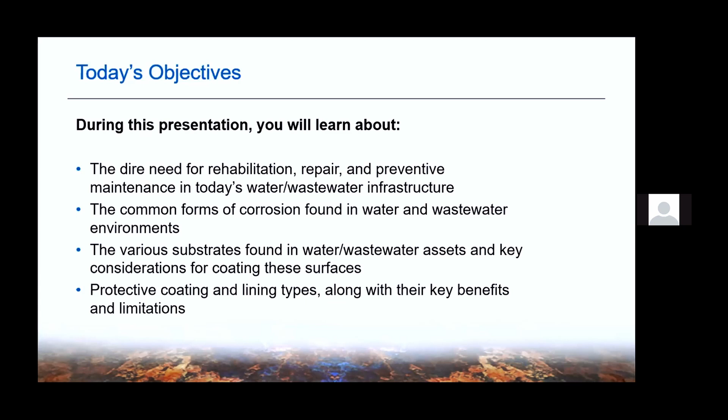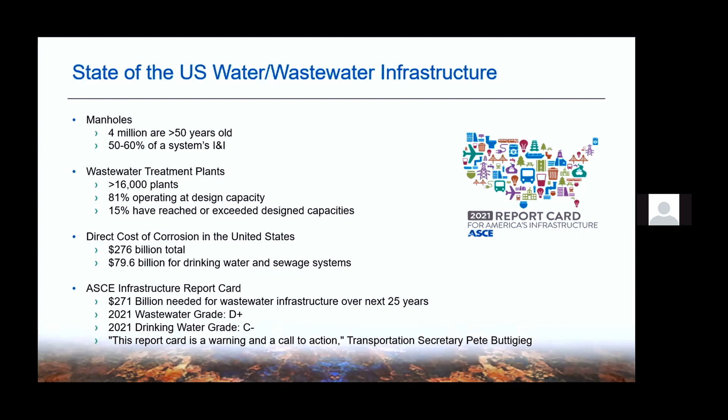So I would venture to say that almost everyone on this webinar today has probably seen the data or has heard the reports about the current state of the water wastewater infrastructure in the United States. If you look at our infrastructure here in our collection systems, many of the manholes are beyond their expected design life. The fact is that there's approximately 4 million manholes here in the US that are greater than 50 years old. Inflow and infiltration is a big issue in a lot of these systems. Quite frankly, a lot of that enters in through a manhole. And what happens is the treatment plants get overburdened with all of this extra inflow and infiltration.

You'll often see manholes called the low-hanging fruit of infrastructure rehab. Part of that is because of their accessibility, but I would say mostly it's due to the fact that about half of a wastewater system's I&I enters in through a manhole.

So talking about treatment plants here in the US, we've got roughly 16,000 or so publicly owned wastewater treatment plants. Scary part is it's estimated that about 81% of these are operating at their design capacity. And the even scarier part is about 15% of those have reached or exceeded those design capacities.

So many of you, being members of NACE and being involved in the industry, you've probably seen a lot of the reports on the direct cost of corrosion. There was a report that came out in 2002. It was a joint report from NACE and the Federal Highway Administration. In 2002, they estimated that direct cost of corrosion to be roughly $276 billion. Some of the latest numbers on that, 2013, it was upgraded to, or downgraded, depending on how you look at it, $476 billion. But I would be scared to see what that cost might be today, given the inflation that we're currently experiencing.

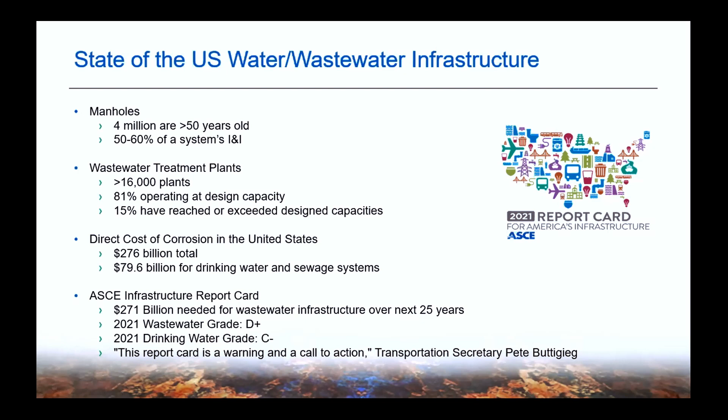So moving on from the US, but speaking specifically to Canada. How does Canada stack up when it comes to the water and wastewater infrastructure? To help answer that question, I referenced the Canadian infrastructure report card. The latest version of that I was able to locate was 2019. It actually rates potable water systems, wastewater systems, and stormwater systems.

So we'll be talking today for a minute about potable water and then wastewater. If you look at the potable water infrastructure assets that were included in this survey, they break it out between linear, the linear portion of these drinking water systems, which are going to be your local water, transmission, distribution pipes. And then your nonlinear assets are going to be your drinking water treatment facilities, your pump stations, and then your reservoirs. And so if you look at that category, kind of the scary part is approximately 25% of the potable water infrastructure was found to be in either fair, poor, or very poor condition.

So if you look at the wastewater side, it's not much better. The wastewater infrastructure assets that they included broke it out very similarly. Linear wastewater assets included your sewer pipes and your sanitary force mains. Your nonlinear assets included your treatment plants, your pump stations, lift stations, and even some of the storage tanks. So the findings of that, roughly 20 to 30% of the wastewater infrastructure was found to be in fair, poor, or very poor condition. So I would say a lot of the issues that we're facing here in the States are really not much different north of our border here.

So when we talk about corrosion, it's important really to talk about corrosion specifically in water, wastewater, and really, how did we get to where we are today? So, the fact is the waste stream has become more aggressive in nature over time. It was fairly common 30 years ago to find hydrogen sulfide concentrations around 10 to 15 parts per million. However, with such things as the Clean Water Act, which eliminated heavy metals from the waste stream, we've seen those numbers, I would say, increase exponentially, and that has in turn caused a lot more corrosion.

There's some other things that have kind of led to this. One of the major shifts was a move to larger regional treatment plants instead of having smaller treatment plants in each community. The fact is, for a lot of these developments, it's a nuisance. They don't want to have a wastewater treatment plant near them. So we started seeing more of a shift to these regional plants. But with that, the sewage had to go further distance. So you had longer transport times. And then you also had longer detention times, which in turn allowed the waste stream to become more septic and in turn more aggressive.

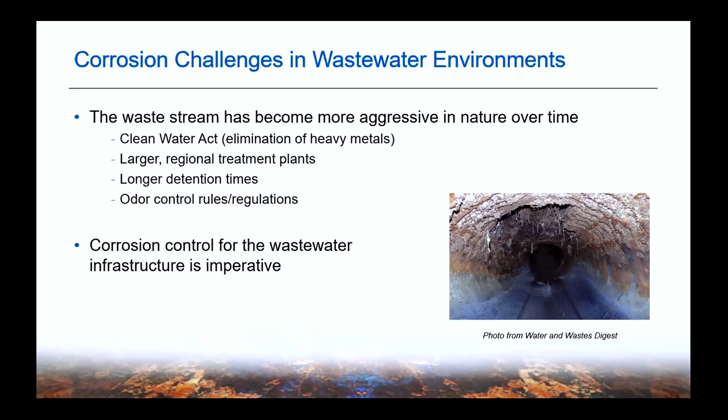So the fact is, and this will be the common theme we'll talk about today, corrosion control in the wastewater infrastructure is imperative, because some of these areas of the system can definitely get very aggressive and can break down a structure very quickly. So it's my understanding that we also have some potable water or drinking water personnel on the phone today. So I wanted to make sure that we talked about corrosion in potable water.

So speaking specifically to water tanks, there's really some common types of corrosion that we see. The fact is, in steel tanks, steel in and of itself is very irregular in its composition. So what you end up with is, on that same steel plate, some areas may act as the anode and others may act as the cathode. And so if you don't properly mitigate this, if you don't put a barrier coating on it, if you don't employ cathodic protection and some of the other known techniques that we have available to us, the result ends up being corrosion attack that really ends up appearing as random, I would say closely spaced pits. Another thing that we see in water tanks is steel that's under stress can be anodic to unstressed steel. Some of these stresses can be caused by welding or through the bending or forming process.

I would say in my time in the field, a very common form of corrosion that I've personally observed is dissimilar metal corrosion. So as you know, putting on your NACE hat, talking about the galvanic series and different metals, you know that different metals in contact with each other will establish a corrosion cell, which will see corrosion occur at the more active metal. So you may see this in a tank at weld seams, with fasteners, and with any other attachments.

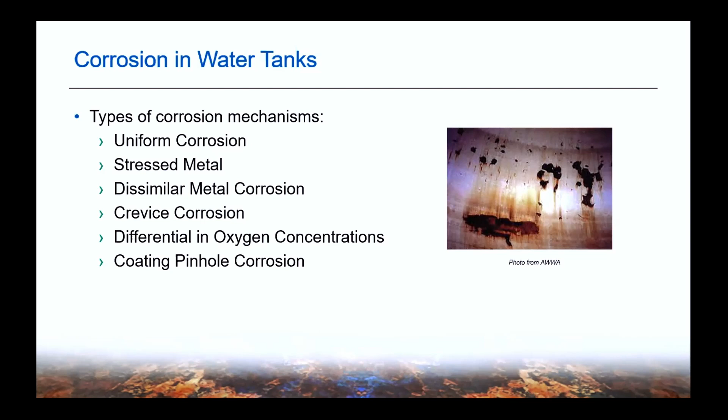So as you know, it's very vital to have a corrosion control plan in place if you're an asset owner. Knowing what we know about corrosion and its effects, it really highlights the need for one of these corrosion control plans, especially for assets in water and wastewater exposure.

We touched briefly on corrosion in the systems, and we're going to dive in here in a minute into some of these corrosion mechanisms in a little greater detail. But just knowing what your substrate and your structure is going to have to hold up to is vital. Cathodic protection may be used in conjunction with a coating system. Protective coatings and linings do a great job and give great barrier protection. We'll talk about some of those different coating and lining types later in the presentation.

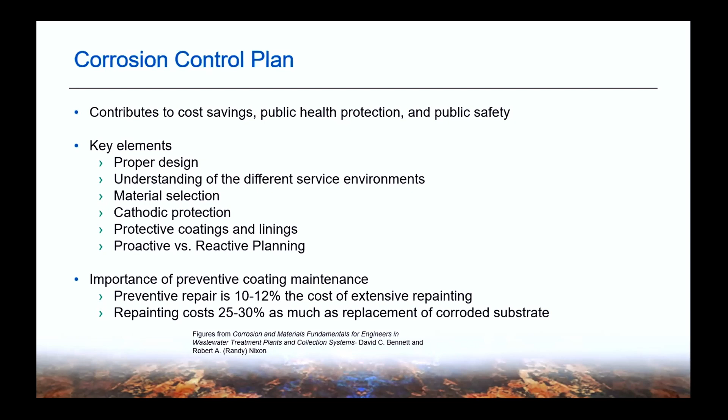But as you know, it's much more cost effective to be proactive with your corrosion control plan rather than reactive. You can see the figures here at the bottom that were mentioned. You think at times it's common sense, but it's one of those things where the can gets kicked down the road, and before you know it, the investment has grown exponentially.

So now that we've talked about a high level overview, we'll dive a little deeper into corrosion in wastewater environments. Here are some of the common corrosion mechanisms that we see in municipal wastewater systems. We won't touch on all of these, but we'll touch on a few in greater detail.

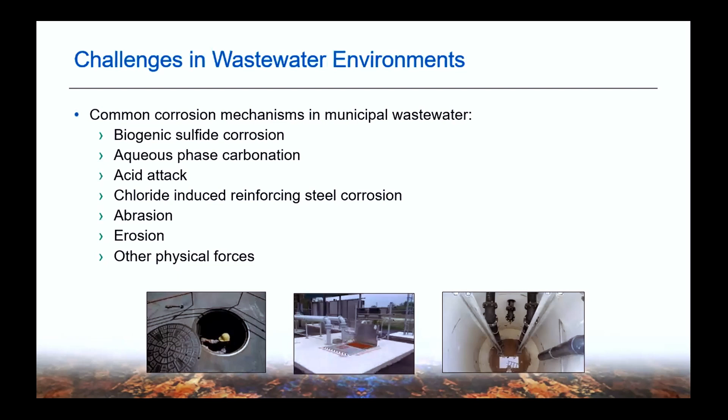The first of these, and probably one of the more heavily researched and reported corrosion mechanisms in wastewater, is what we call biogenic sulfide corrosion. This is driven by the activity of bacteria present in some of these conditions. I won't go through all the steps here, but note that this is a process that happens in stages. The end result is really the item of concern here.

What you end up with is sulfur oxidizing bacteria that consume hydrogen sulfide and excrete or discharge sulfuric acid. This sulfuric acid has actually been measured at a pH of less than 2. The highly alkaline cement paste in the concrete matrix is very susceptible to attack from that low pH acid. If this goes undetected, I've seen this cause concrete degradation up to 2 inches a year. So it can be catastrophic.

With underground assets and assets that you're not looking at all the time, it can act very quickly. You're going to find this in various parts of the system, but the main areas are in the head spaces of structures within the collection system, and in transmission pipelines. As I mentioned, with longer transport times and the waste stream growing septic, you are going to have some attack in those situations. And also in the initial stages of treatment at the wastewater treatment plant: headworks, preliminary treatment, even primary treatment.

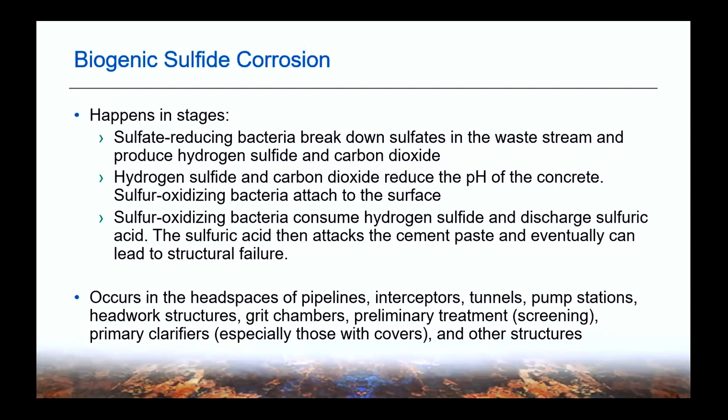So here's a good illustration of how this process takes place. One thing to really note is that a lot of the degradation happens both in the slime layers and above the waterline in the vapor spaces, as you can see listed at the top of the diagram.

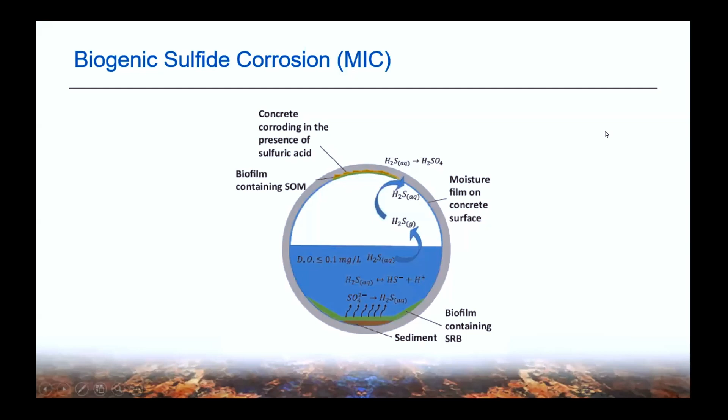So here is a beautiful real life picture of some of the damage that can be done as a result of this biogenic sulfide corrosion. And so take note again that really a lot of the degradation in some of these structures is going to happen up in the vapor spaces. So I can honestly say I would not want to climb down into this one. I may not live to tell about it.

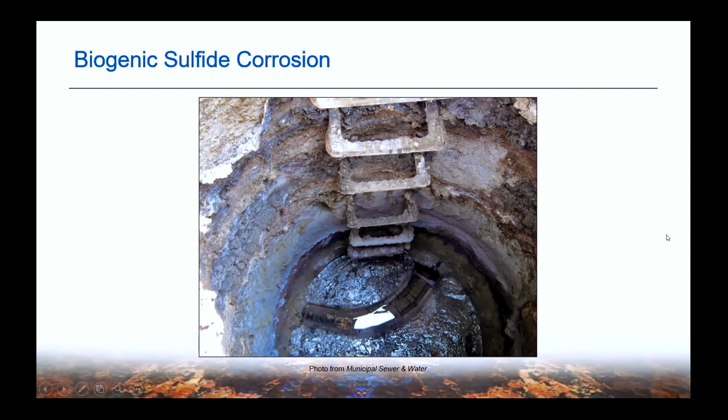And here's, unfortunately, when it hits the news at this point. If left undetected over time, here's what can happen. And once again, it's one of those things that's out of sight, out of mind. So if you're not keeping an eye on your assets and you're not employing some corrosion control techniques and methods, this can be the unfortunate side effect of that.

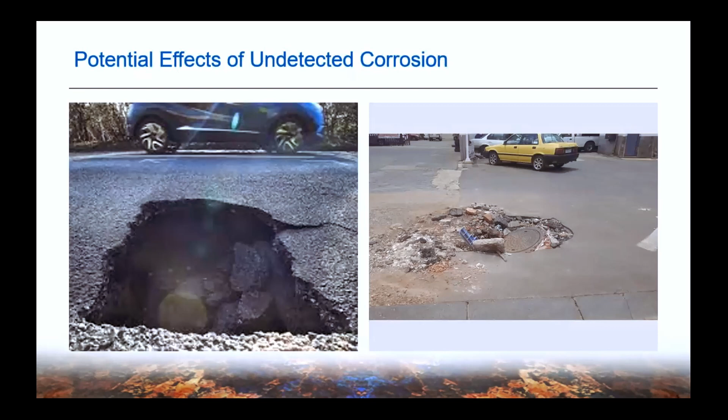So another form of corrosion that we see in wastewater environments that's worth mentioning is carbonation of concrete. What happens here is carbonic acid can be derived in a few ways. First, from atmospheric carbon dioxide in water, but this also can happen below the waterline in some structures where you see dissolved carbon dioxide evolve as that carbonic acid. By nature, this is generally a slower degradation, but there are some factors that can accelerate it that we have listed here. So, the permeability of the concrete, higher temperatures, even higher relative humidity can speed this up.

I've seen this really scattered throughout a treatment plant, but probably the areas where it's most prevalent are going to be your primary and secondary treatment structures, with aeration basins really being one of those where I see this fairly frequently.

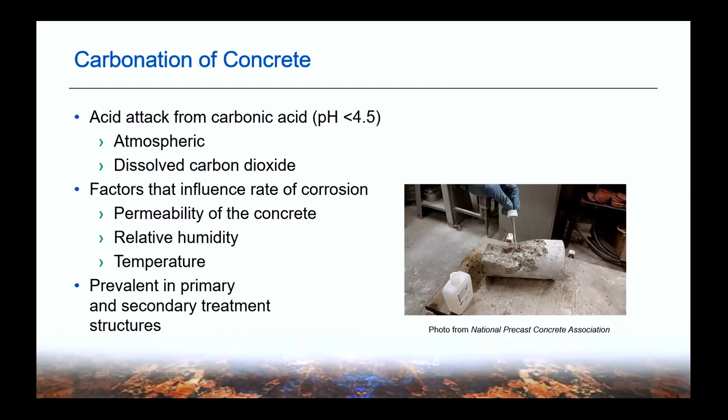So the next form of wastewater corrosion that we want to talk about is chloride-induced corrosion of rebar in the concrete. As you've studied concrete and concrete design, you know that it's generally going to be low in tensile strength. And so typically it's going to be reinforced with steel rebar in order to account for that. What ends up happening in some of these concrete structures, if they're not protected, is you get chloride ions that are going to permeate to that rebar. And initially that rebar is actually going to be passivated by the alkaline concrete around it.

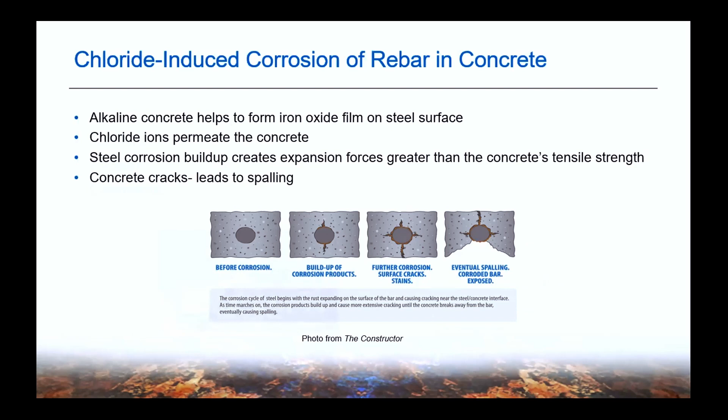But before we move to the next section, it's worth mentioning there are some other abrasive forces and physical forces that need to be accounted for in wastewater structures. Freeze thaw damage, abrasion, erosion, cavitation. Especially when you get into the headworks facilities, grit chambers, some of these physical forces can be very significant. So while we won't talk about these in great detail today, I did think they were worth mentioning because these are things that need to be accounted for and protected against.

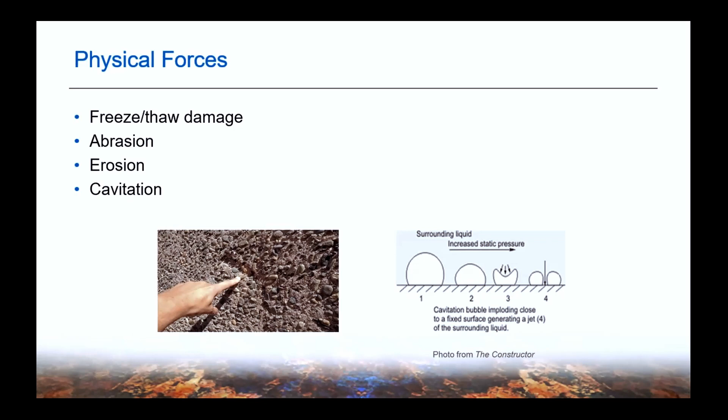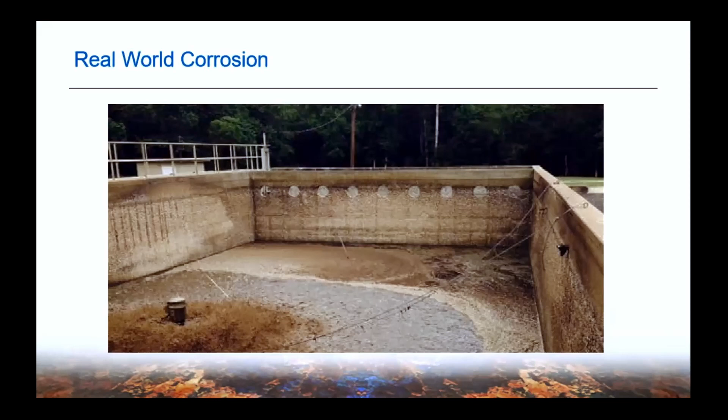So now that we've talked about really a high level view of corrosion in the system and talked about some of these corrosion mechanisms, I'd like to dive in for a minute and talk about some of the commonly seen substrates that will need to be coated in water and wastewater environments.

So this discussion on substrates and wastewater exposures is going to logically begin with concrete. It's estimated that about 80 to 85% of the substrates in wastewater environments are concrete substrates. I mean, the fact is it's the most widely used construction material really across most all industries, but you can really say that for the water wastewater market. So concrete's used really in various structures all throughout the system. You see it all throughout the collection system. You see it all through a wastewater treatment plant.

Concrete in these environments, you're going to be exposed to atmospheric corrosion, but then also you're going to have many of those corrosive forces that we just mentioned in immersion service within these structures. So, as we've alluded to, concrete really can see various corrosion effects, including biogenic sulfide corrosion, where that Portland cement is attacked. And like I mentioned, if left undetected, that can be very, very catastrophic in some cases. We also see acid attack, sulfate attack. I mentioned carbonation as well as the physical forces.

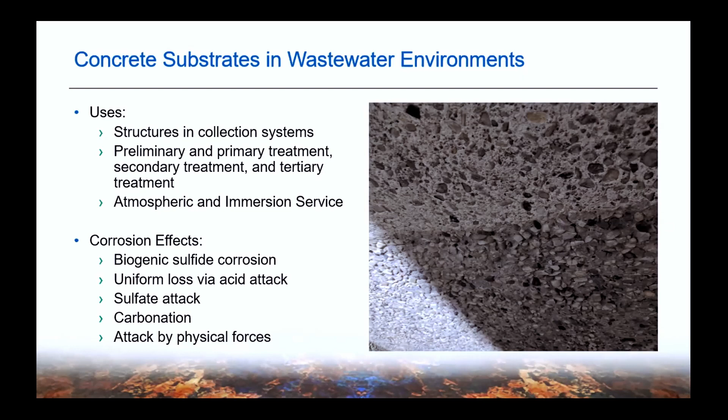So before coating concrete, it's important first to properly clean and prepare the surface. So a great reference standard for that, many of you have probably reviewed and know the ins and outs of, but SSPC-SP13/NACE No. 6 is probably the most commonly specified concrete standard that I see out there. There's currently some debate whether it's a standard or a guide, but I'll leave that for another day and another discussion. But this is a good guide because it does give some inspection procedures prior to surface preparation, and then it also really lays out some of the different methods of surface cleaning, and then it talks about some of the different methods of surface preparation.

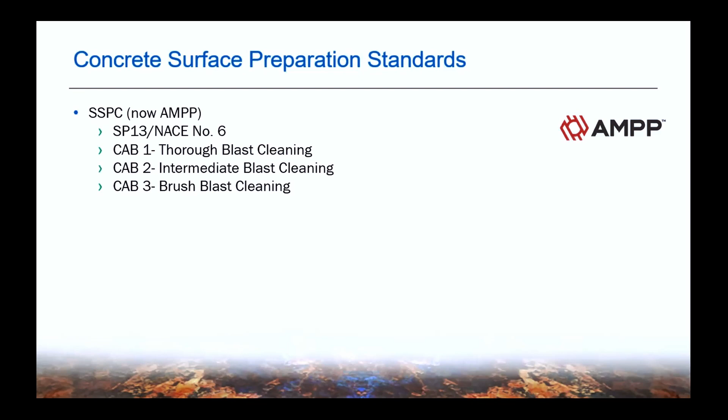I thought it was worth mentioning here some of the newer standards that you see, the SSPC CAB or concrete abrasive blasting standards. There's actually 3 levels of that, and these are written specifically to preparing concrete surfaces that will end up receiving a lining system in most cases. So when you're building a specification or reviewing a specification, there's also several ASTM standards that speak specifically to concrete prep, which are listed here. But the one I wanted to focus on here is the ICRI standard, the 310.2R, which does a great job of laying out the various concrete surface profiles, or CSPs as we refer to them. These are going to be called out typically before you apply any resurfacer, coating, or lining.

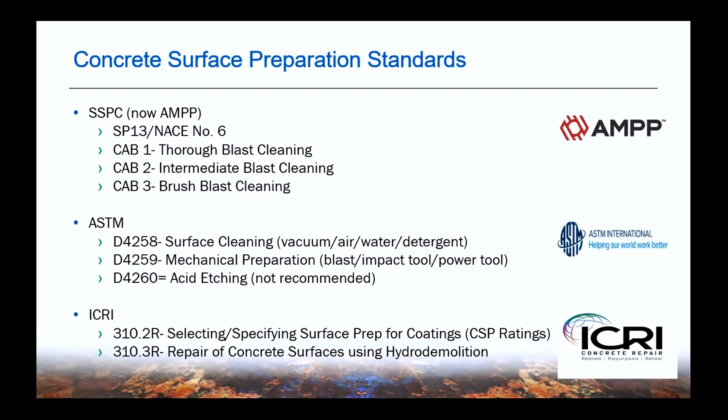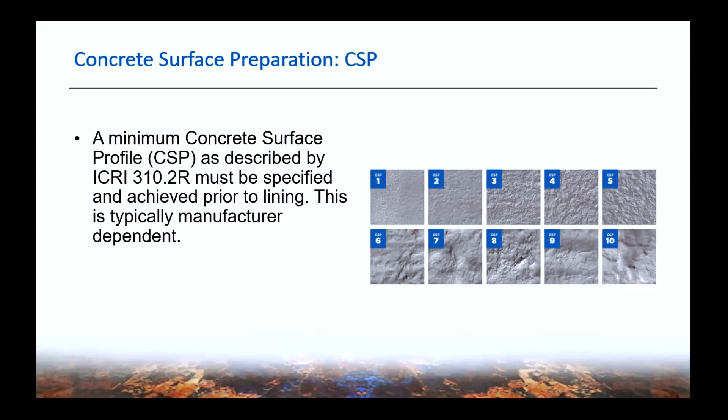So some other things to consider with concrete: first is the fact concrete is very porous, and a lot of times that's caused by the air voids in the concrete. Another thing to look at, and something that sometimes gets left out, is the pH of concrete. The pH of new concrete is going to be roughly 12 to 13, but to coat concrete, you really need that pH to be 9 or above. There's some methods out there to test for pH, but note that anything below that 9 or 10 pH is going to denote that there is some kind of contaminant there, or that there's been a prior chemical attack. And whatever it is, it needs to be addressed prior to applying a coating to that surface.

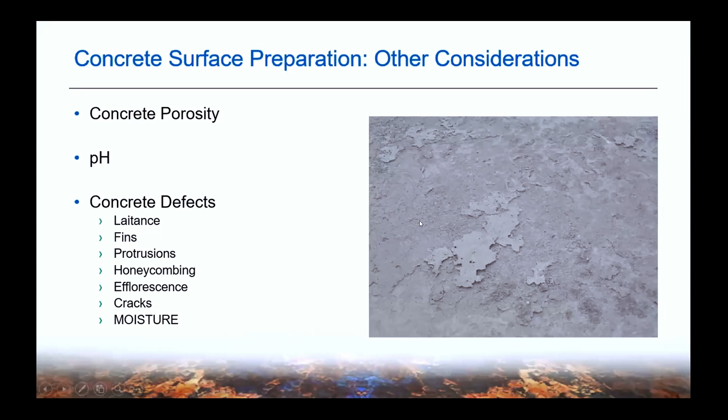So talking about the methods, now that we've covered some of the considerations with the concrete substrate itself, really the question is, how do we get there? And I would say probably one of the most effective means for preparing concrete surfaces to be lined is abrasive blasting. We alluded to that there's several standards out there that really lay out some of these guidelines, and then there's also some wet abrasive blasting methods that can help suppress dust as well that we see used fairly often. But all in all, I would say this is probably one of the most effective means of preparing a concrete surface, especially for a thick film liner.

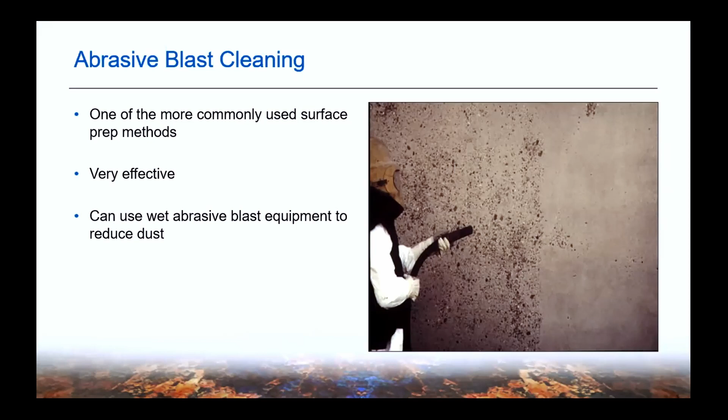So once we prepare the surface, another thing that unfortunately gets forgotten about sometimes is resurfacing. There's several different ways to get there, several different types of products you may see out there. There's a lot of cementitious goods, there's straight epoxies, and then you also see epoxy mortars used. But this is a vital step, talking about outgassing and pinholing and achieving the proper service life. I would say a lot of that is very dependent on surface prep and then proper resurfacing.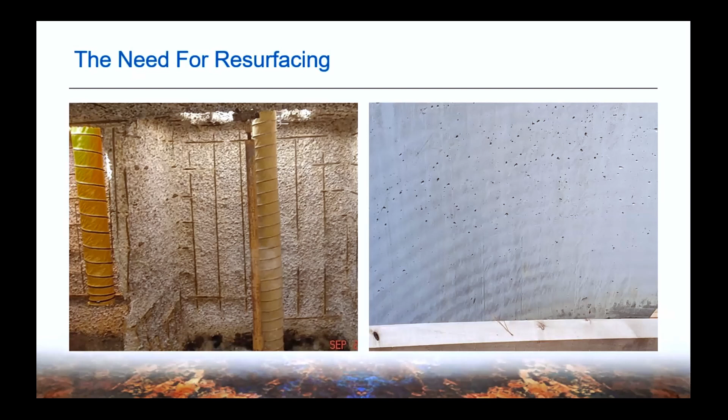So when talking about coatings for concrete specifically, there's several considerations. There's many more than these, but these are just a few of the things that you may need to consider. First off, is this going to be immersion service or is it going to be atmospheric service? Those forms of corrosion can be very different from each other. So it's important to know what kind of service it's going into.

And then speaking of service environment, let's just talk about a wastewater treatment plant. It's important to note, is this concrete substrate going to be in the headworks or is it going to be in a final treatment structure? The fact is, the headworks is going to be more abrasive, more aggressive. So you're probably going to need a more robust material in that area. We alluded a minute ago to some of the repairs and some of the resurfacing that may be needed. That's something to consider when coating concrete.

And then there's also some of the physical properties that you may need to consider. With the structure itself, are there cracks that need to be bridged? Do you need flexibility in the lining system? Does the lining need to have low permeability? There's really a lot of things that you need to ask here. And I know on the coating side, these are questions that we ask often just to make sure that we're recommending the right material and that we're helping you optimize the life of that asset.

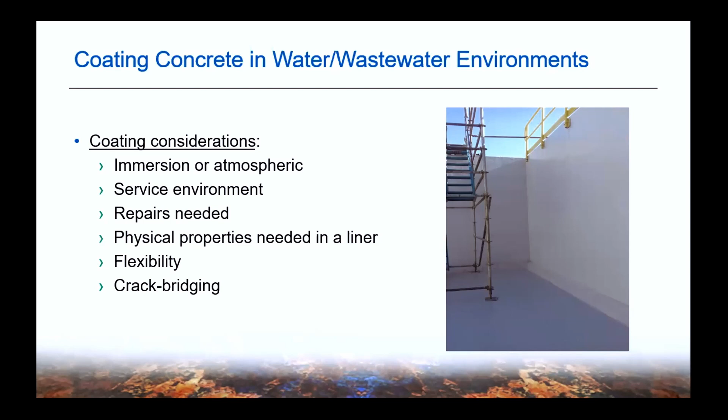So another common substrate you're going to see in these environments is steel. The fact is, steel is the most commonly used metal in construction because of its cost, quite frankly, and its availability. Ironically, though, it corrodes at the highest rate when you compare it to a lot of the other metals that are used in construction. So within wastewater specifically, you're going to see steel used in various immersion and atmospheric exposures. And because of its nature to corrode, protective coatings are needed to protect steel in these various forms of corrosion.

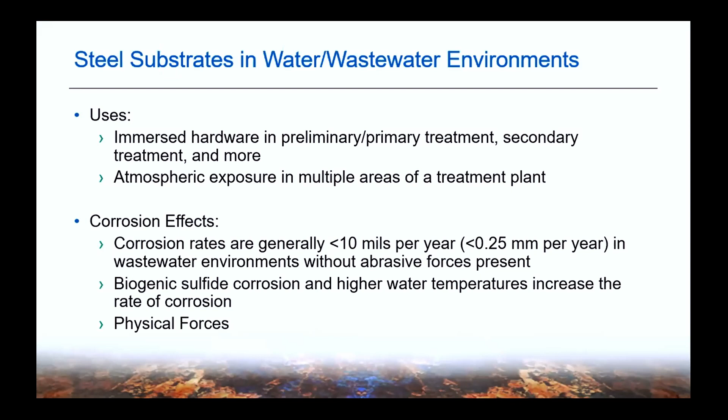So like with concrete, surface preparation is going to be vital here. The surface preparation of steel, including its cleanliness, really should match both the service conditions as well as the intended service life of the coating system. So if you're in immersion service, surface prep's going to be typically SSPC-SP10 near white. We sometimes see SP5 called out in some extreme cases.

For atmospheric exposure, SP6, a commercial blast, is going to be preferred, but there may be situations where a hand tool or power tool clean may be the only thing that's possible. Blasting may not be feasible. The plant may be in operation. It may disturb too much if you end up bringing a blasting operation in. So knowing the difference between the levels of surface prep and making sure that matches the service is very important.

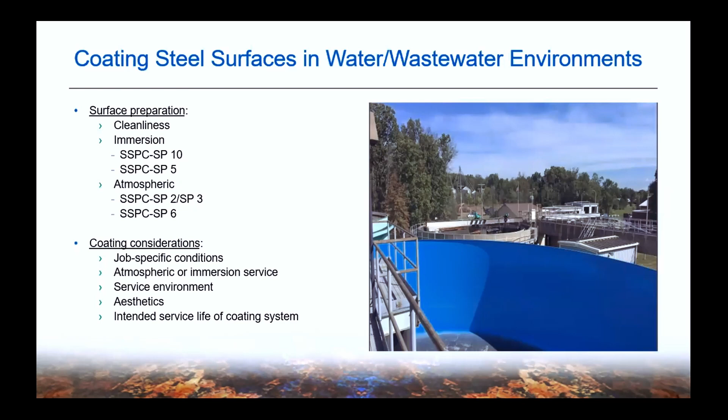So another substrate worth mentioning, and actually where I reside is the capital of the world for ductile iron. Kind of a little fact there, but ductile iron is one of those substrates that is often misunderstood, and a lot of times you see specifications trying to get contractors to treat it like steel. But first and foremost, knowing how to prepare these surfaces is going to be vital, because it is different than steel.

But in general, ductile iron has very high tensile strength. It's very durable. So you see it used a lot with pipe fittings and immersion, buried, or even atmospheric exposure. You do see corrosion with it if left unprotected, if it's in corrosive soils or in sewer pipe, biogenic sulfide corrosion, and then other really abrasive or physical forces can also wear it down over time.

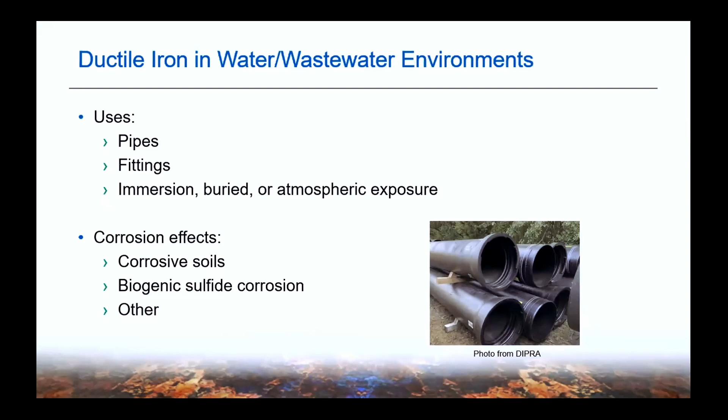But as I mentioned, when looking at ductile iron and when thinking about coating or lining it, it's not like steel. So the proper surface preparation standard that you should be looking at here is NAPF 500. And note within that standard, there's differences in how to address the interior as well as the outside.

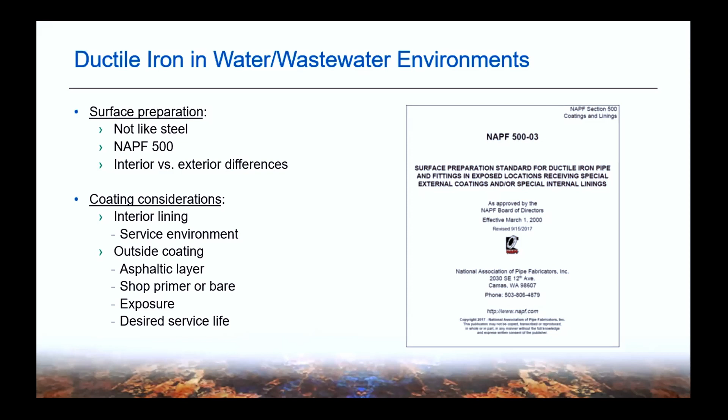And another important thing to note is when you see a stick of ductile iron pipe on a job, if not specified any differently, a lot of times you're going to see an asphaltic coating on the outside of ductile iron. That's standard issue for a lot of these manufacturers. And the problem is you can't really coat over that asphaltic layer. So it's important on a job, if it is going to receive a high performance coating, to make sure that it comes without that asphaltic layer on it.

Within a plant or within the infrastructure, you're going to see other substrates. We won't really dive into these in any greater detail today, but note that there may be instances where you need to coat galvanized steel, where you may need extra UV protection for PVC, stainless steel, aluminum. Maybe these are in very aggressive areas that you need that duplex or dual protection there. So with these, refer to the manufacturer and make sure that the proper surface prep is being employed, because sometimes these aren't the easiest to coat, but knowing how to address these is very important. So definitely consult your specification and your manufacturers there.

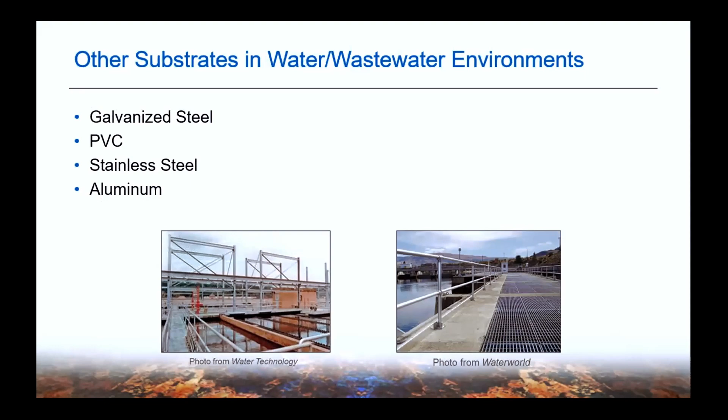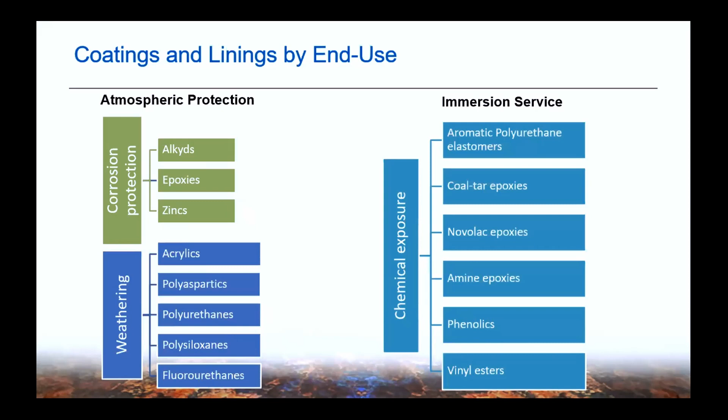So the last thing we'll touch on today is kind of that 30,000 foot view of some of the different coatings and linings that are used in water and wastewater environments. And this is just a good illustration here. The way we break these out, as I alluded to earlier, we look at coatings for atmospheric protection, and then we also look at coatings and linings for immersion service. So there's multiple technologies and multiple products out there that can address these different services. And that's where people like Ravi and myself are asking a lot of those questions on the front end when we're helping someone design a specification, just to make sure that we're specifying the right material for whatever that service exposure is.

So first, when you're talking about atmospheric coatings, there's some different considerations here. You may be concerned with aesthetics, with having a material that has very high color and gloss retention. You may be looking at a material that has great weatherability. Some other things to consider, if you're in a plant, is the criticality of that structure. Is this something that can't be down long? If that's the case, then you might need something that cures quickly or returns to service quickly, or is maybe even a little more surface tolerant than some other materials.

There's regulatory needs. There's certain parts of our country and parts of the world where VOCs are a major concern. So knowing what the local VOC restrictions are is very important. And one thing that's often forgotten about is the maintainability of that atmospheric coating system. If a plant has the proper corrosion control plan in place, they're going to probably be maintaining that system over time. So they may opt for something that is easier to repair, easier to touch up over time.

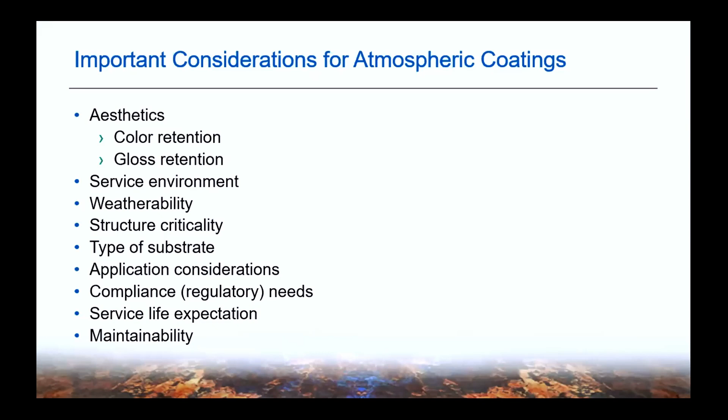So when you look at coating types for exterior atmospheric protection, there's some different categories that you see listed there. Zinc rich coatings, we see these used often as a prime coat on the exterior of steel substrates. These materials are going to provide great galvanic protection. I would say of these, epoxies are really the workhorse material. One limitation of them, though, is their poor color and gloss retention.

So that's really where your polyurethanes, polysiloxanes, and your fluorourethanes come in. And of those, polysiloxanes and fluorourethanes are going to be your higher cost materials. However, they're going to give you the longest service life and the longest color and gloss retention. And then, before moving on, acrylics are worth mentioning. We do see those used in some maintenance scenarios and then also in some overcoat situations.

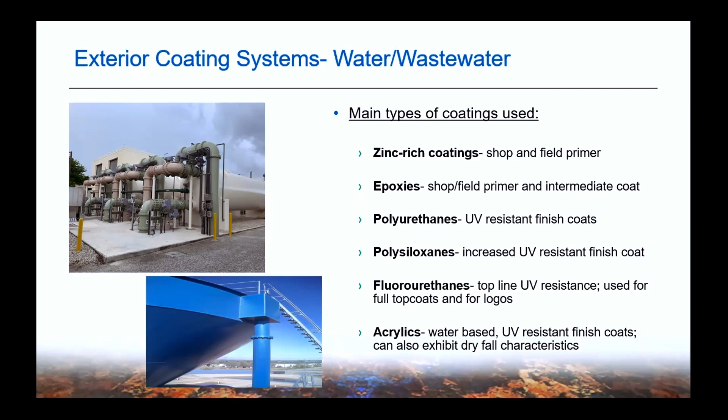And so shifting gears here, the last few points we'll make here. When you're looking at immersion service, you can really break it out between wastewater immersion service and potable water immersion service. These have some different considerations that we have listed here. We've touched on a lot of these on the wastewater side, but I would say primarily being able to match the lining type with the exposure is going to be the most important here. In those more aggressive areas, having coatings and linings that have hydrogen sulfide resistance and low permeability are going to be some of the most important factors there.

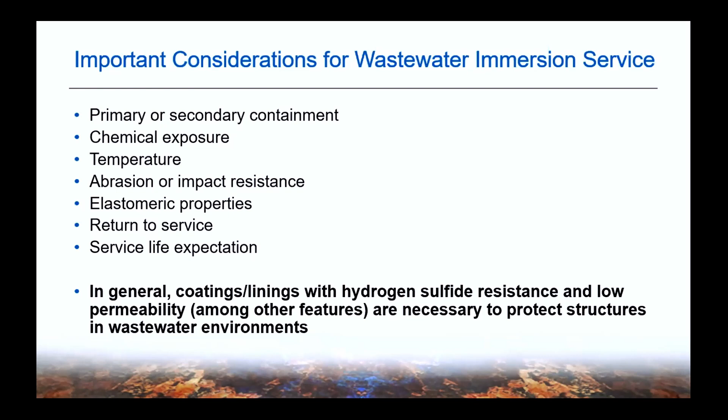And then when you look at the potable water side, naturally, it first and foremost needs to be NSF 61 certified. This can be a whole other webinar in and of itself, and this is a talk that I give quite a bit, but the new companion standard NSF 600 that's taking effect at the 1st of 2023 means any material that's going to be used in contact with potable water has to comply with it. So that's going to shift some of the specifications that we see out there moving forward.

But then also, if you're looking at some of the different inside coating systems for a water tank, you may have instances where you need something that returns to service very quickly. You may need something that has high film build in a single coat, or you may even need something that can cure in lower temperature, such as polyurethane technologies.

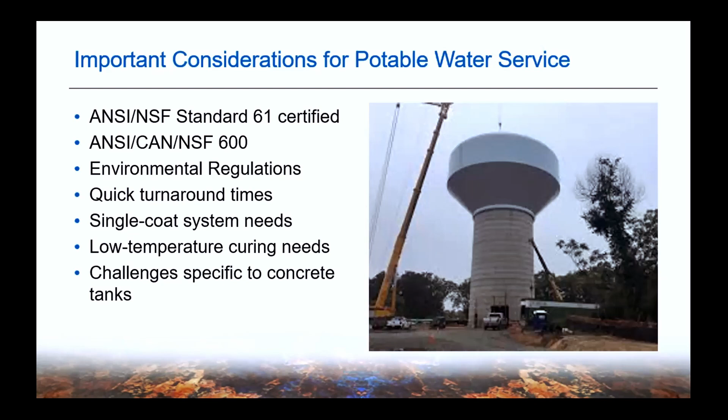So we won't touch on all these, but I did want to point out the two main products that we see in immersion service. First of those being epoxies. These are really the workhorse of lining materials. They're going to give you good barrier protection against a lot of various elements. Generally speaking, they have good chemical resistance, good water resistance. The application of these, you've got some flexibility there. These can be applied in some cases by brush and roller or by single leg airless spray. Some formulations you can even add a mortar blend to and trowel on.

And I would say probably the majority of epoxy linings we see used in the space now are going to be high solids or even 100% solids. And so talking about NSF 600, you're going to see a greater shift to these types of materials as well. Just real quick, some of the disadvantages: some of these epoxies can blush, they chalk when exposed to UV, very little elongation. So if you have a structure that may have some movement or where you may need a little crack bridging, something like a polyurethane may be a better choice there.

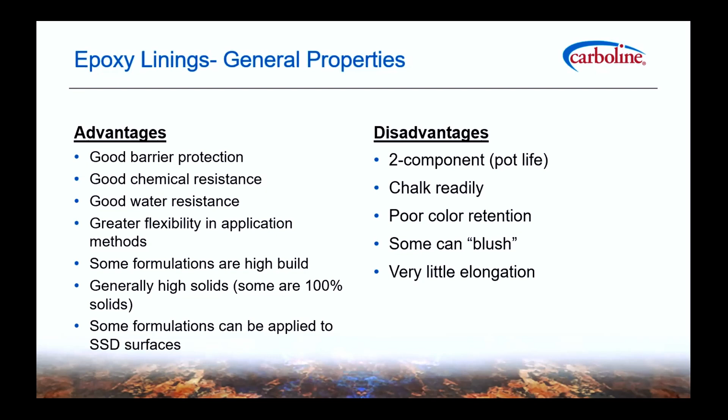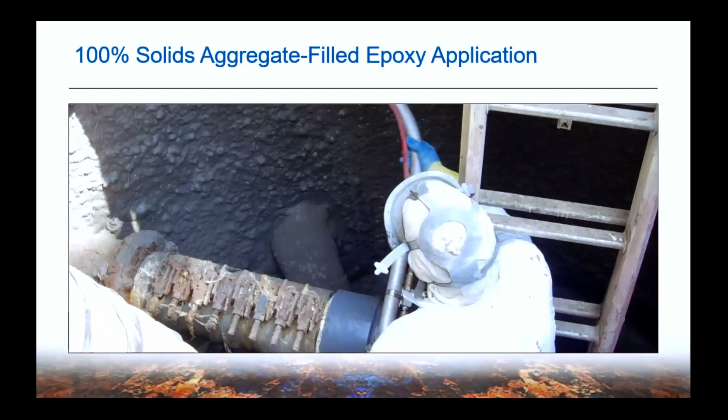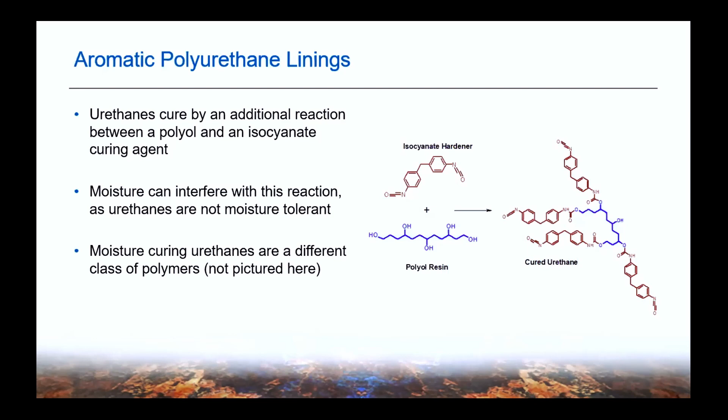Here's just a few examples of some epoxy lining applications. And here, as I mentioned a minute ago, would be an epoxy fortified mortar. And so aromatic polyurethane linings, these are materials that have been used in Canada for quite some time and have some definite benefits. Just note when I talk polyurethane in this context, we're talking aromatic, not aliphatic. Aliphatic is going to be your atmospheric exposure. Aromatic is going to be typically your linings.

And so I alluded to that these have higher elongation. These can be applied in extremely high film builds and can be returned to service very quickly, in some cases 2 to 4 hours. They've got great physical characteristics. They're abrasion resistant, they're damage resistant. And I would say very important for your climate is that they can cure down at lower temperatures. But some of the things to consider are that they often require plural component spray and will require DH in a lot of cases because they are very sensitive to moisture.

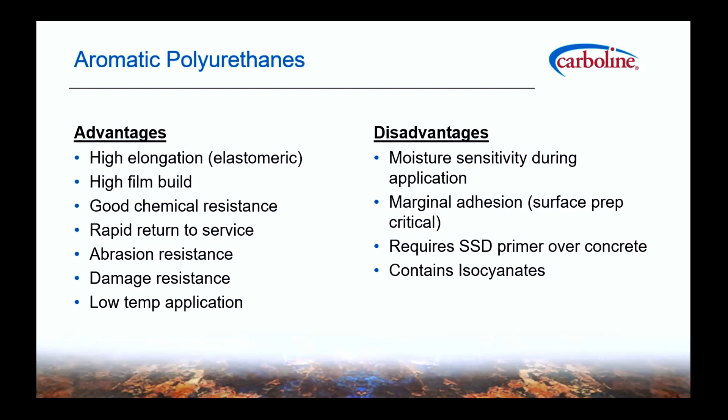And going back to surface preparation, they have marginal adhesion. So your surface prep has got to be really good with these types of materials. And here's just a few examples of some applications of aromatic polyurethanes. So you can see they've got some good overall flexibility in where they can be used. We see them used really both in water and in wastewater.

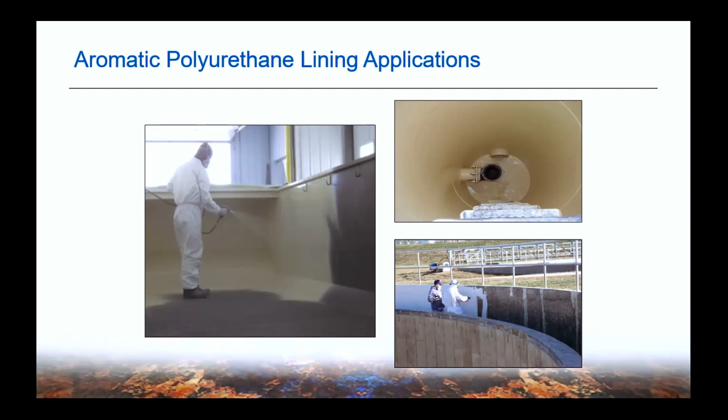So just some final points before we go to Q&A. I do want to point out that, talking about a corrosion control plan, if you're an asset owner or an engineer assisting an asset owner, it's very important to have one of these in place because it really can extend the life of a lot of these key assets. Knowing the different types of corrosion that's present and how to protect against these forces is very important. Knowing the different substrates that you're going to run into and knowing how to properly prepare those and how they differ from each other is very important.

And I would say, when looking at protective coatings and lining materials, really note that there's no one coating or lining that does it all. There's not really a one size fits all. So there are a lot of tools in the toolbox, and there may be instances where we use one over another, but it's definitely important to lay out all those considerations on the front end.